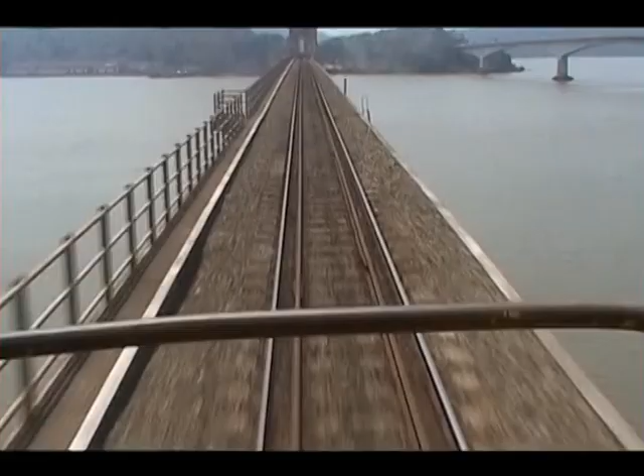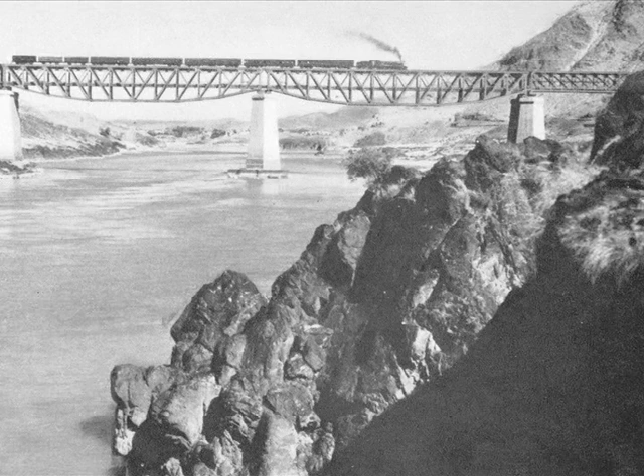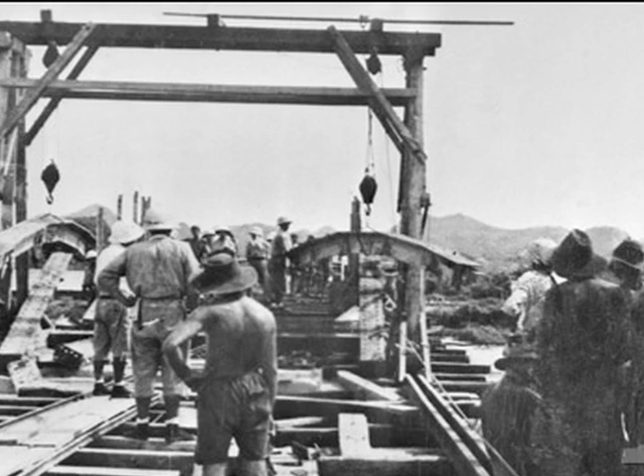And yet, the subcontinent is extensively interlinked through the railways that often crisscross through difficult terrain such as rivers, valleys, and mountains. A large proportion of railway bridges in India are steel bridges. Of those, the bridges of the 19th and the early 20th centuries are made of an early kind of steel containing more phosphorus and sulfur that makes them brittle in nature and so less reliable.

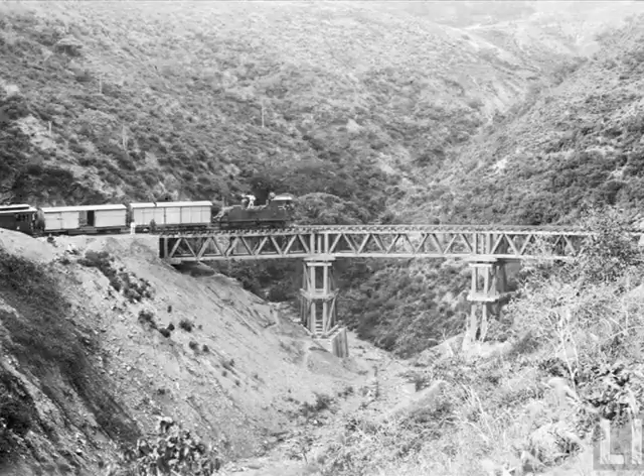Trains must ply, however, with a guarantee of safety and efficiency to millions of passengers every day. In order to maintain that promise, the Railway Board made a policy decision to replace early steel bridge girders on the railway system. Looking at the diversity in the kinds of bridges in this country, the task demanded a great deal of responsibility and innovation.

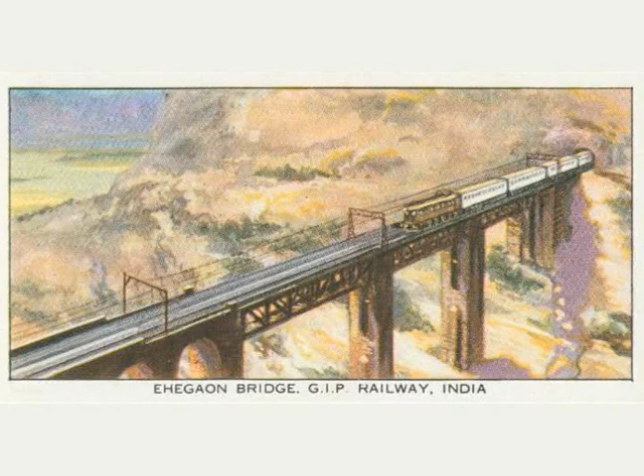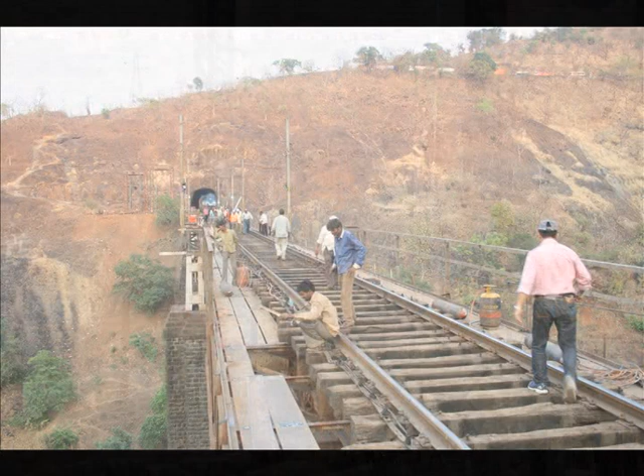Faced by challenges like rugged terrain and limited space, replacement of 43.5-meter underslung girders on this bridge was definitely a difficult, labor-intensive and precision-based task. This is a very challenging job for the railways. This bridge was constructed more than 100 years back, and needs replacement.

On Indian Railway, we have planned to replace all the early steel girders. These early steel girders are more than 100 years old, so it was not safe to run the trains on this type of girders. On Central Railway, this is the last girder which is being changed. We have completed all the works of bridge which was overdue.

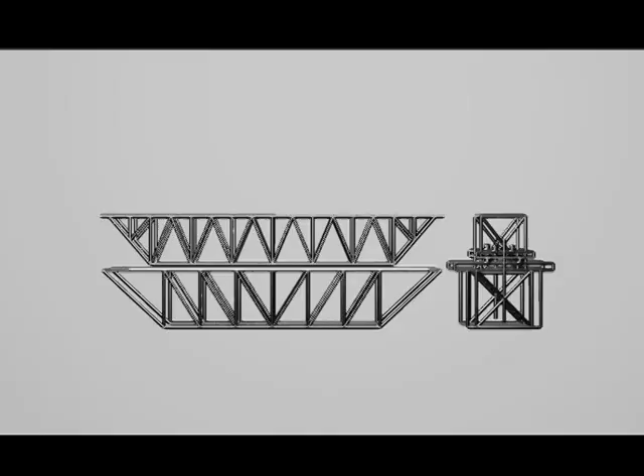The engineers decided on steel girders for their lighter weight over PSC girders, thereby avoiding the strengthening of the substructure and the foundation. And since the trusses of the existing girders were 3.9 meters apart, a narrower new girder could be launched to fit within the existing trusses, thus paving the way for retaining the existing architecture, which was the most appropriate for the terrain as it blended with nature beautifully.

To reduce horizontal loads, the pendulum bearings that had helped distribute longitudinal forces onto abutments and piers had to be replaced. The solution was found in pot PTFE-free bearings, where the entire longitudinal forces would be transferred to the lower abutment 1. These bearings also had the added advantage of requiring little maintenance.

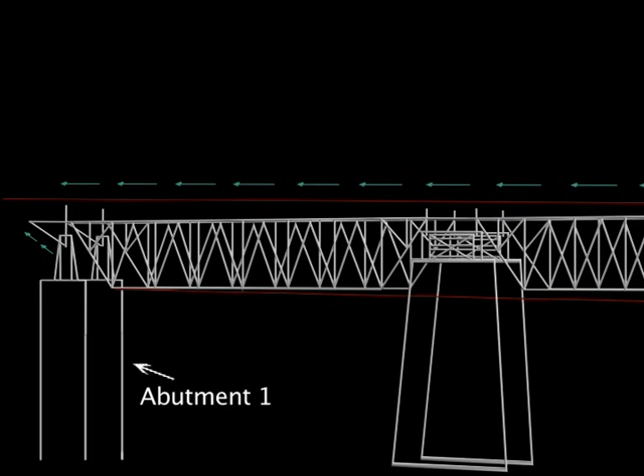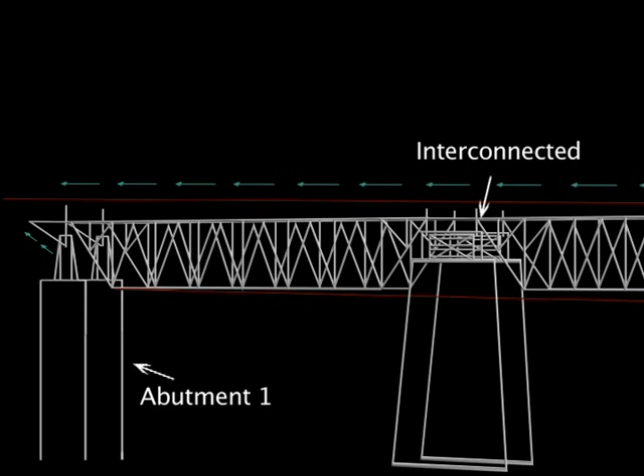Since all the longitudinal forces had to be transferred to abutment 1, the girders had to be interconnected. These were basically pinned connections, which had to be designed to transfer only the longitudinal forces with the help of an extended arm of the girder connected with the trestle on the abutment.

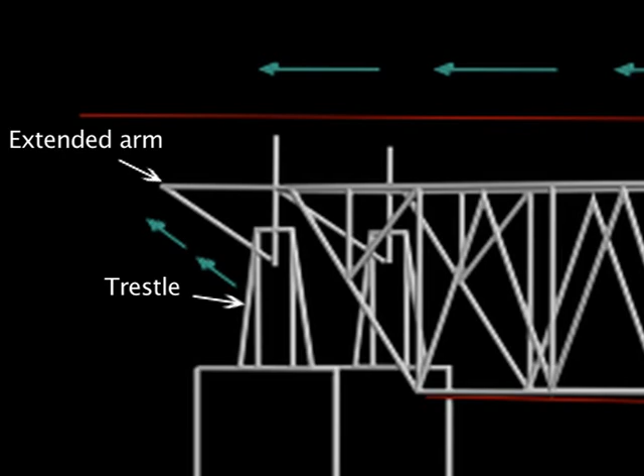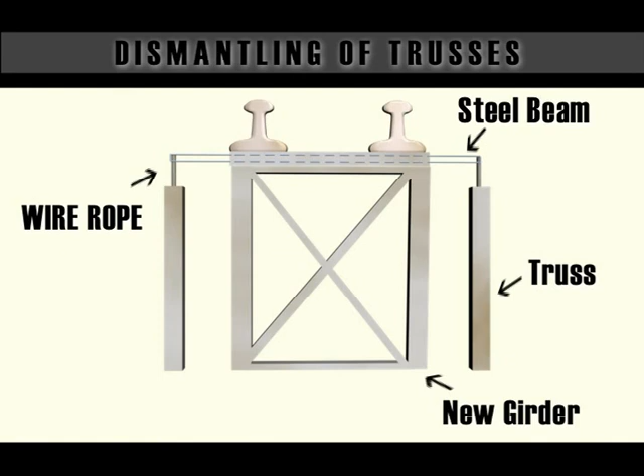Cross beams were fixed in between the sleepers at 8 points on the top chord of the newly launched girder, and the old trusses were hung on these cross beams with the help of wire ropes. Following that, the truss members were dismantled one by one in a predefined sequence so as to prevent sudden collapse of the trusses.

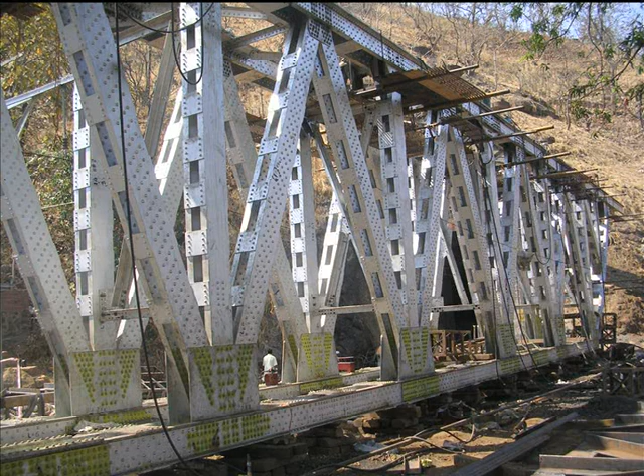The contract for the Airgaon Viaduct regirdering was awarded to Pilcon Engineering of Nagpur on the 3rd of July 2008 with a target date of completing the girder replacement job by the 30th of May 2009.

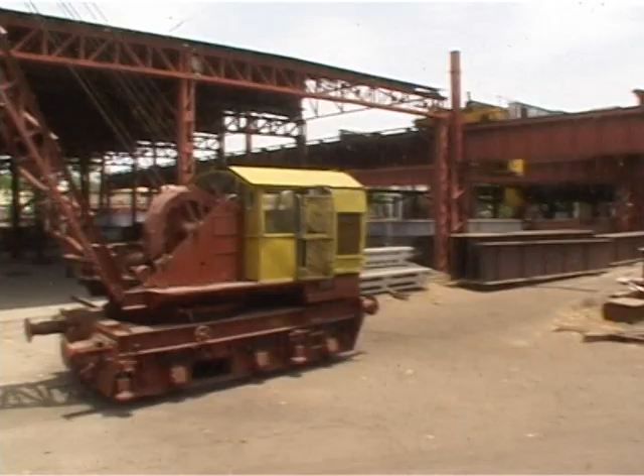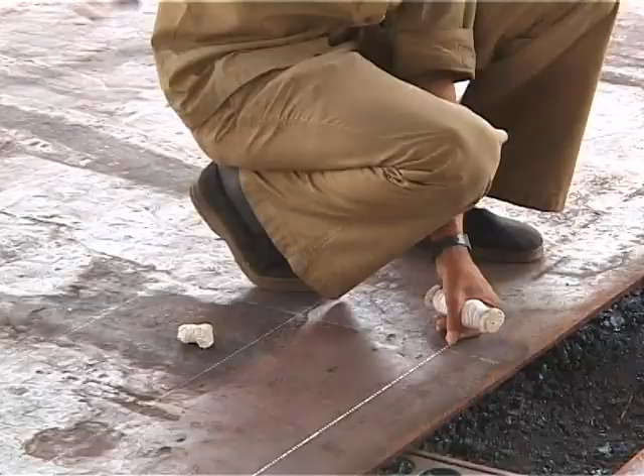The fabrication of the new girder was done in-house by Central Railway at their Manmad workshop. It was a step-by-step process, in a way establishing the format and tempo for the entire job. Once the drawings for manufacturing feasibility were verified, full scale-sized templates were prepared to fabricate the first members of the girder. Jigs and master preparation followed. Now the actual fabrication of the members began.

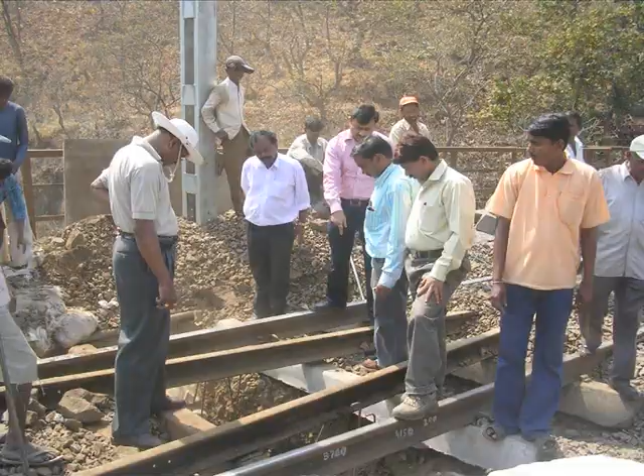Tunnels, there is no site, there is no road approach. Every material has to be transported through rail, taking traffic and power blocks, which made the

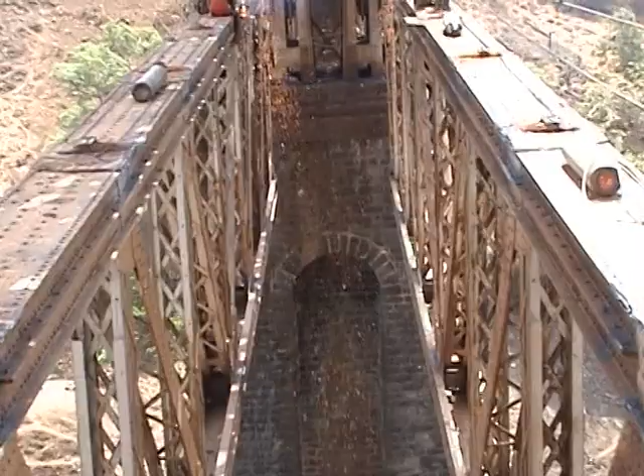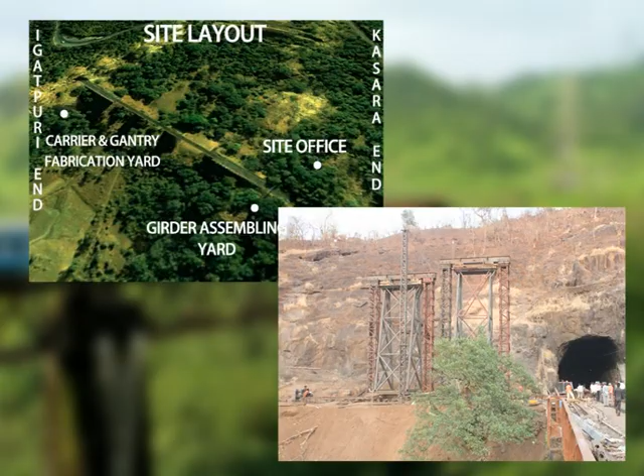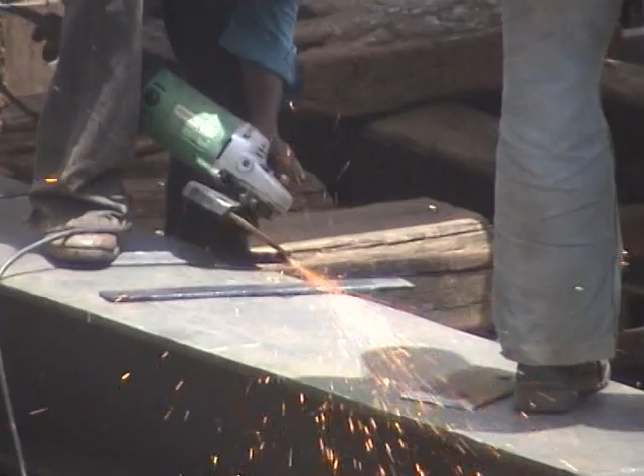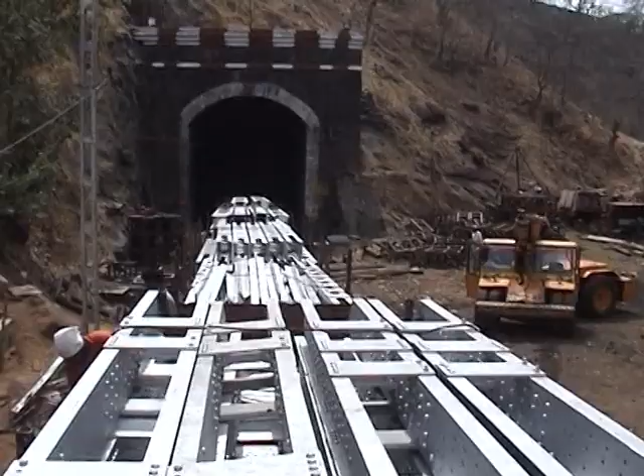The Ehegaon Viaduct girder replacement job began with the construction of the site office, girder assembly yard and the carrier and gantry fabrication yard. Next, necessary equipment. The site. The members of the underslung girder that were assembled here were transported from the Kasara yard on BFRs. The girder finally began to take shape as it was assembled here under challenging conditions.

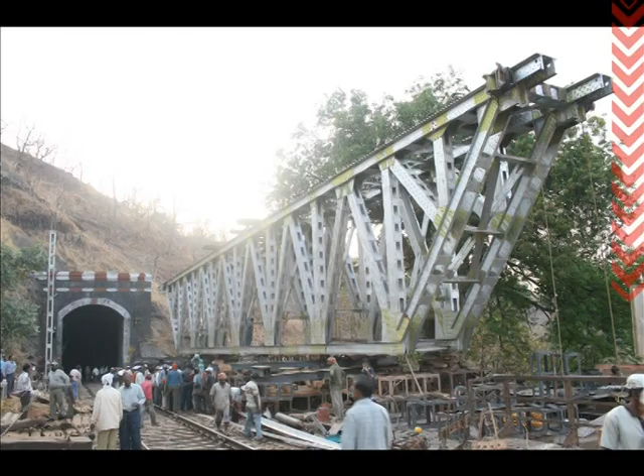Field riveting involved 18,000 rivets per span. All these rivets that are intended to hold the structure for decades to come were supplied by the Manmad workshop. Everything was in-house at Central Railway on this job to ensure the best quality. The assembled girder was pre-lifted to a height above the BFR height.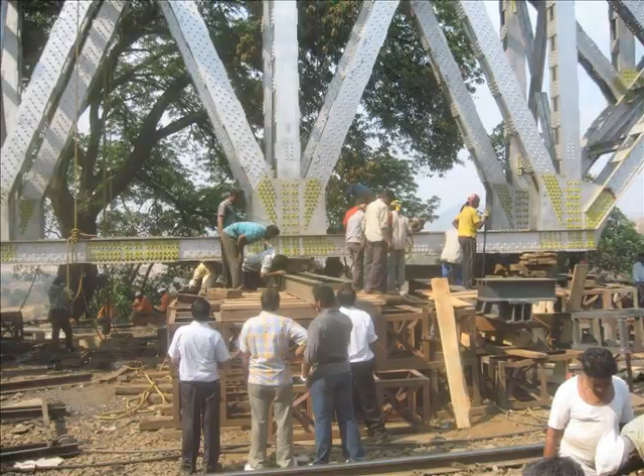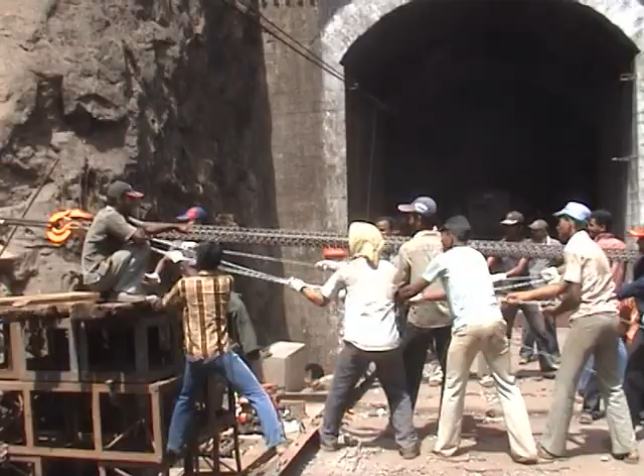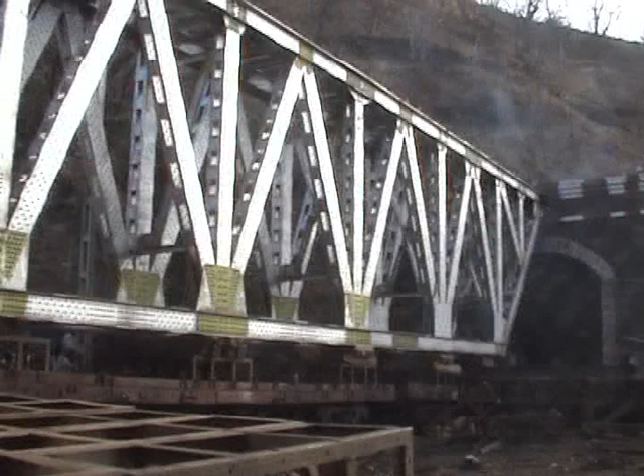During the block, cross beams were placed on top and across the BFR on which the girders were side slewed and positioned directly over the BFRs entirely by teams of men working in unison on pulleys, chanting as they went along. After correct positioning, the cross beams were released and the girder was supported at all bottom nodal points on the BFR and fully secured so that it didn't slide or topple during movement on the upgrade.

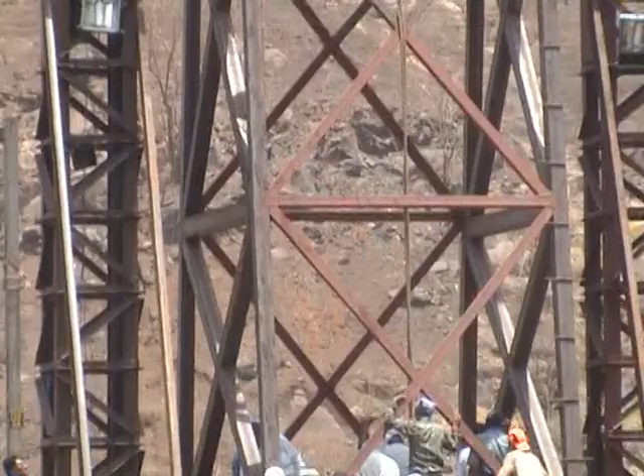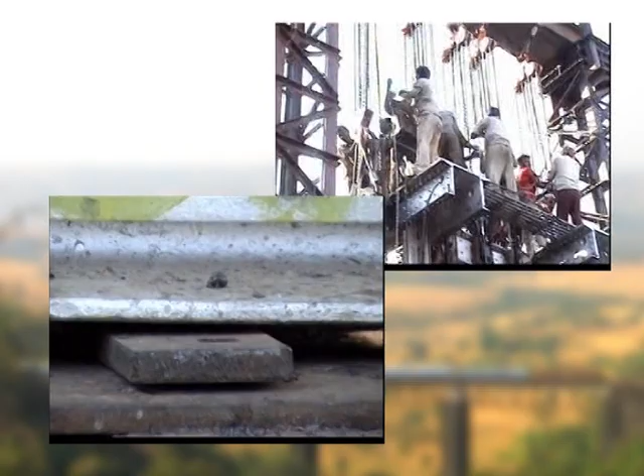The gantries were specially designed to take the girder load, with the main concern being prevention of failure in buckling. Since the gantries were 10.6 and 11.9 meters high, these had to be strong enough to take the girder load and also eccentric loads if any, and yet be light enough to be transported to the required location. The gantries were pre-tested for the girder load on the assembly platform.

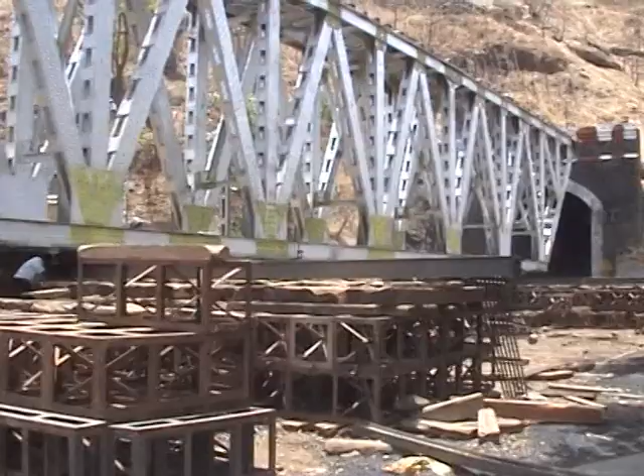Carriers of two sizes were fabricated, one each for the two gantries, to transport these gantries from the yard to the abutment and pier locations. With the gantries in position and the girder firmly in place, the girder special was ready to move into the final position. It was a small distance from abutment 1 to the gantries, but a precarious task getting there. The girder was eased into position.

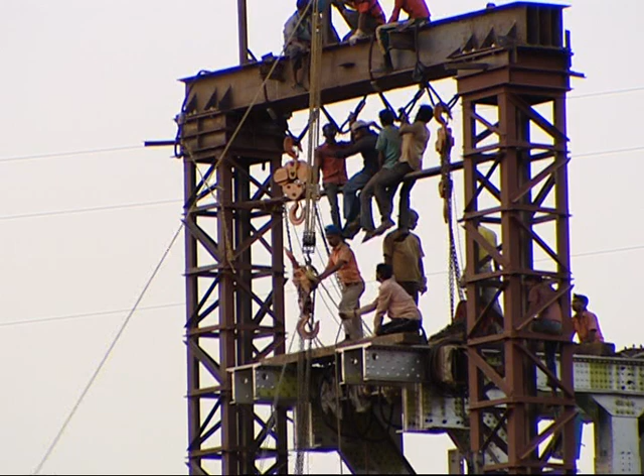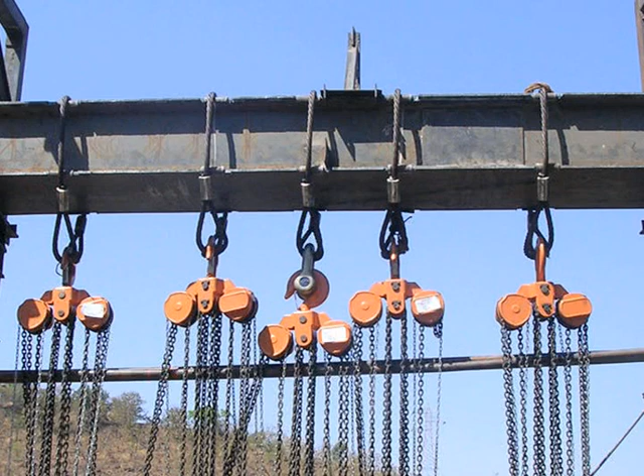The pulley blocks were fixed to haul up 160 tons of steel by sheer manpower. A total of 12 pulleys were deployed for the job, 10 for actual operation, while 2 as standby. These 10 pulleys were distributed as 5 each on the 2 gantries. The pulleys that were used were of rated capacity of 20 tons each and were tested in the laboratory for 1.5 times the rated capacity and later at site for the girder load.

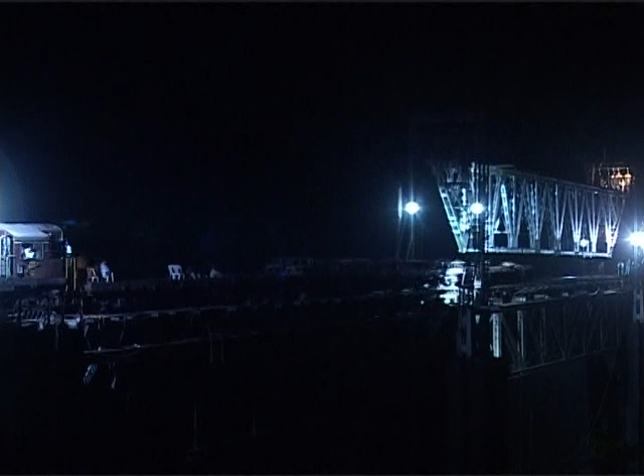Familiar sights and sounds resounded again. Slowly but steadily, the girder was raised enough for the BFRs to pass. Work was on schedule. The track underneath and the floor system was dismantled, making way for lowering of the new girder. The girder lowering took place in the sweltering hours of the afternoon the next day.

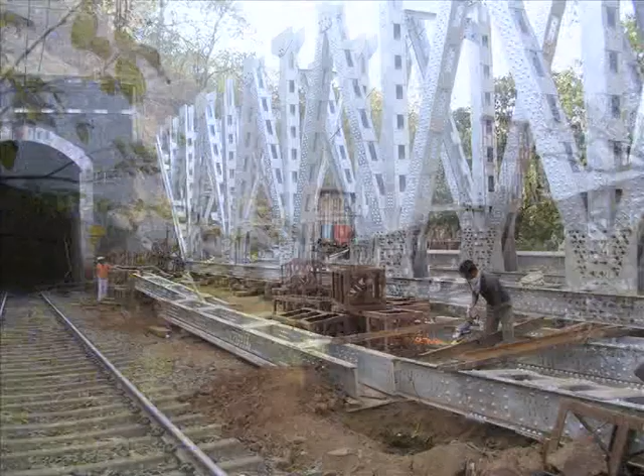This scheme required the least block hours and least energy as the girder would be lowered by the force of gravity. In addition, assembly of the girders was at a safer location with better control on various operations, including that on riveting. It took great effort to maintain the girder in a horizontal position during the last phase of lowering it onto the new pot PTFE bearings, which was extremely important for the uniform loading of the gantries.

The entire job was a precision-based task made possible by mind and body synchronicity. Finally, the girder was properly seated with bearing positions and the girder matching perfectly. Despite everything, the job went on like clockwork. We are standing about 180 feet above the ground level, and to think of a scheme which was viable and which was also at the same time economical was a great job.

The trusses of the old girders are about 3.8 meters apart. The new girder is about 2.1 meters apart only. So we could conveniently place it inside with very little margin on both the sides. So it was a very precision work. And then because we are about 180 feet above the ground level, we had to see that everything goes safe. Passion, great idea, planning, and of course the hard work and dedication at the time of execution. That has carried us so far.

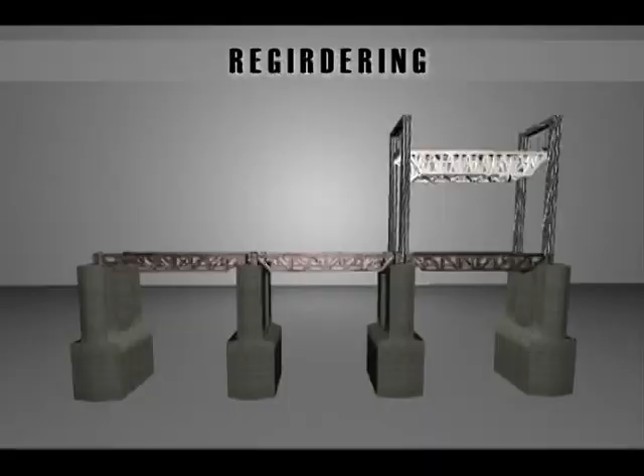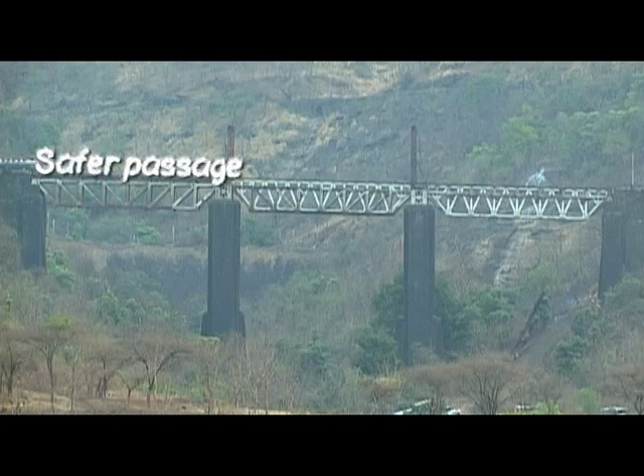It's a wonder what can be accomplished despite the odds when engineers put their minds to it. The Airgaon Viaduct girder replacement job signifies Indian Railways' engineering proficiency. The people on this job worked round the clock to complete the girder replacement within the stipulated block.

A proud moment for the entire team, and this has been possible because of the support of all our senior officers, our Chief Bridge Engineer, the Principal Chief Engineer, the General Manager Central Railway, and the hard work and dedication of all the staff down below, the Executive Engineer, the Assistant Engineer, the Bridge Engineers, the Bridge Inspectors, and all the Group D staff that are available over here.

The complete work of making a site where the girders could be placed and the launching of girders was therefore undertaken under extremely difficult site conditions. I am very happy to see that the complete work of the launching of the girders has been completed on the 21st of May 2009, much before the onset of the monsoon. So, the next time you are traveling in a train, passing over a steel bridge, you know how it got that safe.